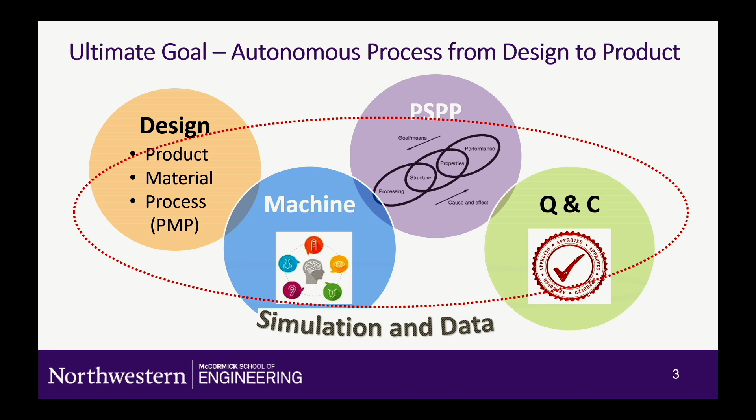One of the things we are focusing on particularly is flexible manufacturing processes. When we talk about flexible manufacturing processes, the volume could not be so much, but it's very much linked into distributed manufacturing or point-of-need manufacturing. One of the things we did with Ohio State as lead is this ERC HAMMER, hybrid autonomous manufacturing, moving from evolution to revolution.

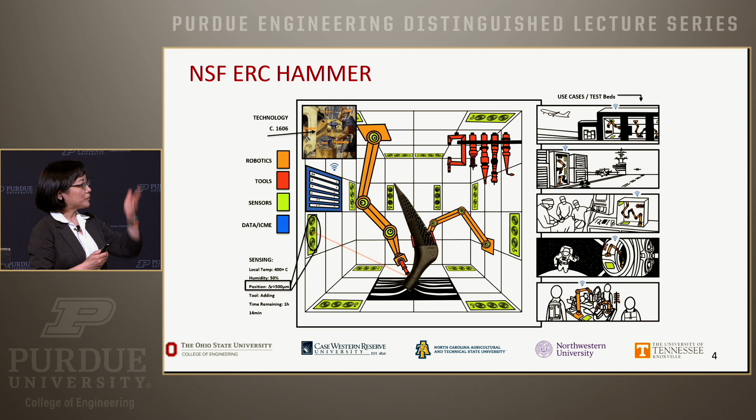So the vision is, if you have a flexible process cell, you can do additive, you can do machining, you can do deformation. The goal is certainly to get the property as well as the geometry right, and the performance of this. You can have it on a ship, near the hospital, in space - particularly here we are talking about space manufacturing a lot, so in space as well as around the corner.

So the vision is if you could have this coming together, what would be needed? As you could imagine, the design freedom is not just about a one-shot design. It's very much time dependent as well as localized material dependent - spatial and temporal degrees of freedom.

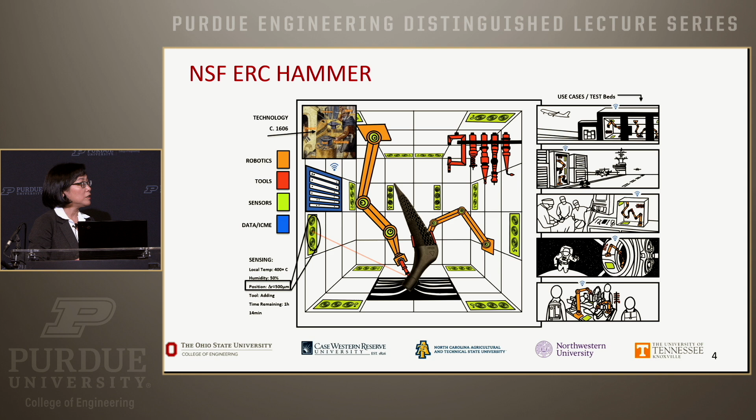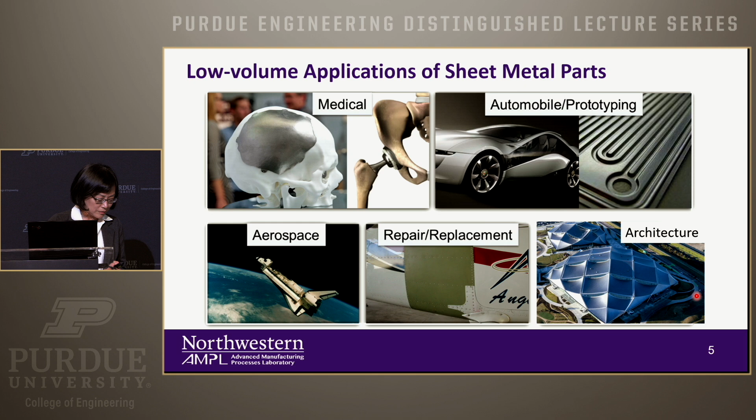And this process that made it is the so-called incremental forming process. The incremental forming process we do is so-called double-sided incremental forming. Instead of doing dies, which you probably need a lot of time for - like 5 months or more to get to the die and then make the part - with this flexible process you can really make all these different geometries from a single machine, but controlled very differently, computer-wise and software-wise.

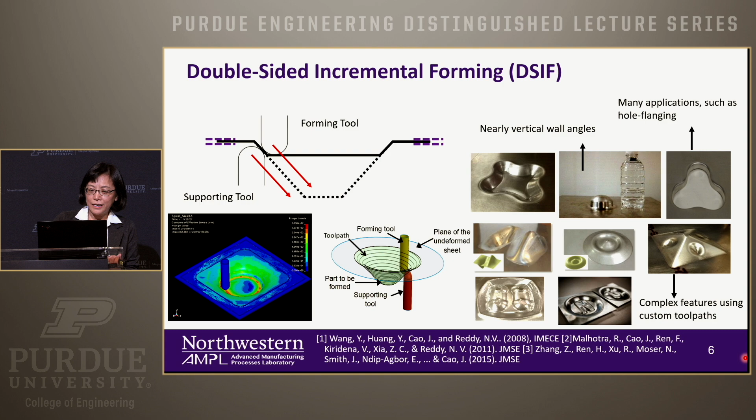If you look at the reference, this goes back to 2008 when we started this, and it's really great to see companies picking this up. The next video is actually from a startup company, now with over 100 people already in LA - the company is called Machina Labs, and they have been scaling this up with more degrees of freedom added to it.

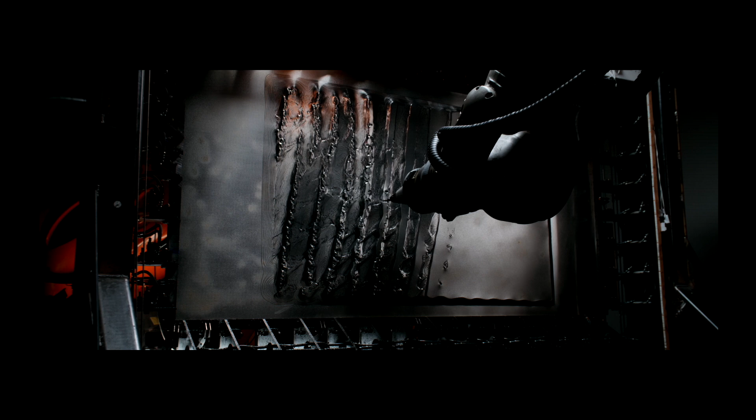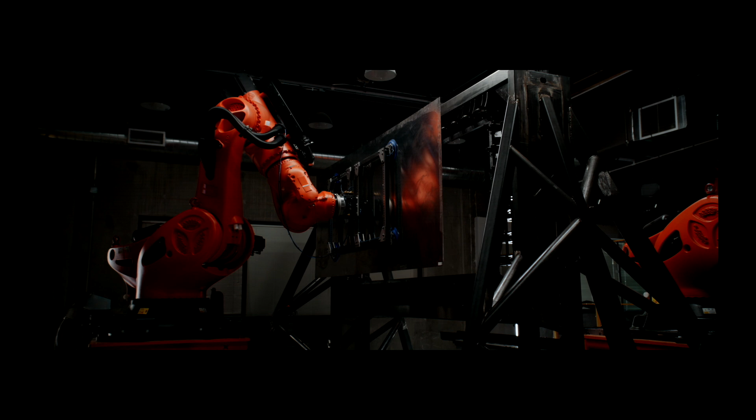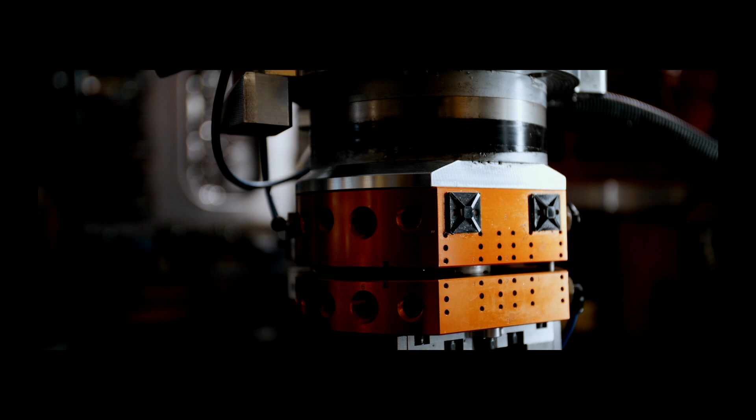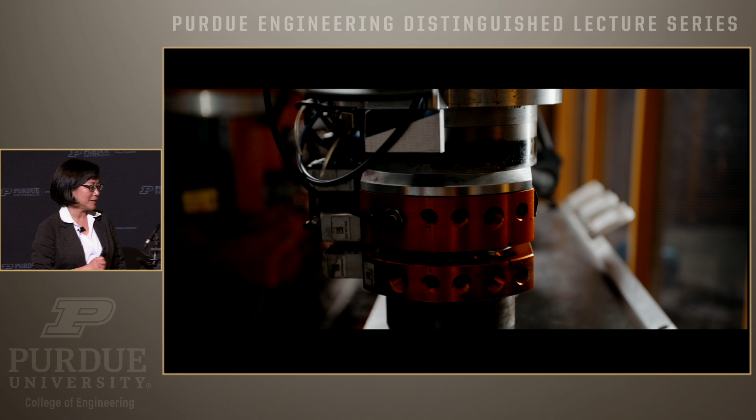The sound should come out if you could. But if it doesn't come out - I'm going to stop the video right here. But the message is, when you have robots combined with this flexible process, you can actually do quite a lot.

For example, if you look at all these four different parts with different materials, you can do it within a week. That is the speed up we are talking about in terms of the flexible processes.

However, the challenge is that when you do this, if it's a simple geometry, it's okay. But if you have more complex geometry, how do you make the first part right? A lot of mechanics and control goes into this.

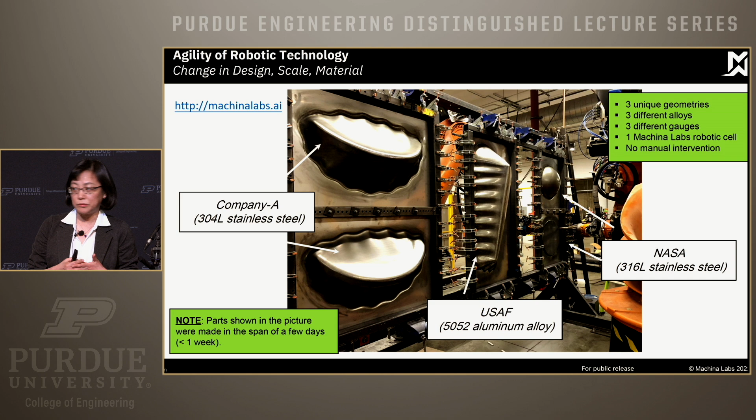You need to understand the material behavior, plan out the toolpath process, and do active toolpath feedback control. The bottom line is predicting the force needed during forming, because that force transfers to stress in the materials, and when you do elastic unloading, you get lots of spring back. So force control and force prediction are critical.

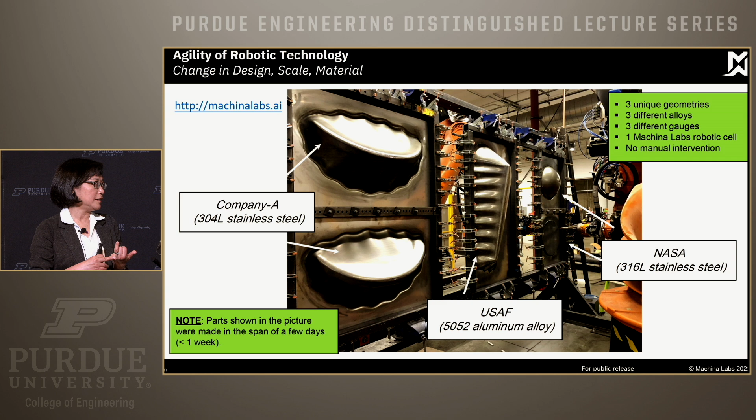So the question we ask ourselves is, when we do this in my lab - here's a scale compared to Northwestern's, and here's a human for reference. In my lab we have very small parts because we don't have lots of space, but the Machina lab here is 1.5 meters by 2, could be up to that size.

So how do we get the knowledge from what we have in the lab, combine it with theirs, and translate it to different scales? Our goal is: can we have a prediction that's machine-size independent? When you have different actuations, you also get different rigidity in the system - can the tool setup be agnostic of that? And if you change the material or geometry, can you be agnostic about this too? So how do we do this?

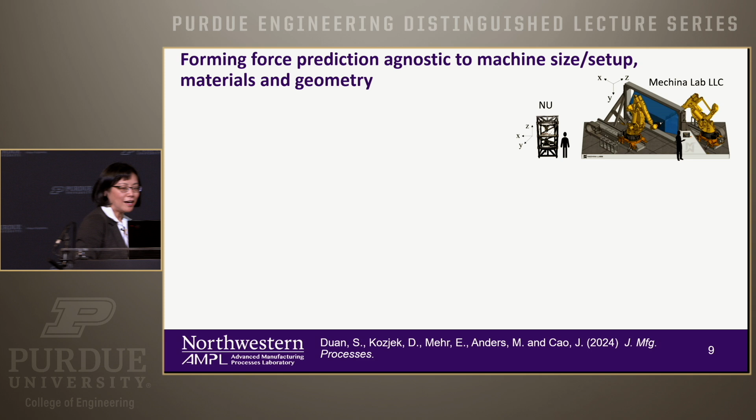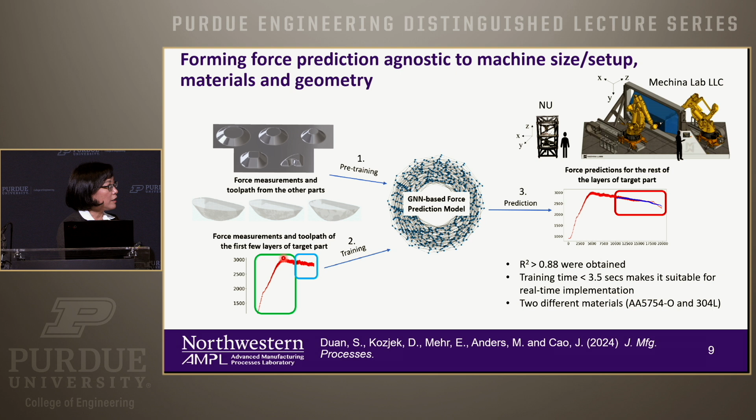AI comes as a helpful thing here. Here's a schematic of what we have. When you think about the mechanics, the initial several rounds of forming already involve the material. If you look at the force data, the initial part quickly goes from elastic to plastic, and for this area you already have the integrated machine rigidity and material properties - it's embedded information.

When you do the first few rounds, these are forming toward the bottom lines, so they're not at the final geometry yet. If you could learn from the initial points and adapt to capture that information, you can use it to predict what's going to happen later on. That's our approach.

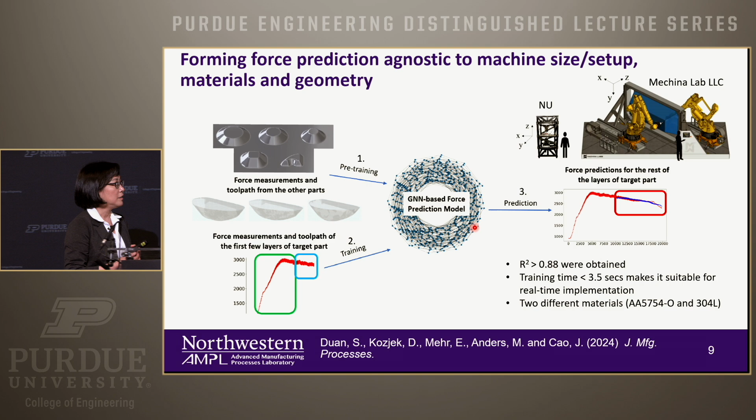In order to get geometric agnostic prediction, we also use a GNN in the middle as the architecture for the model. The bottom line is that understanding the fundamental mechanics of the process actually helps you design the strategy for how you want to use machine learning and AI in the prediction.

So we did this, and we can see that it actually predicts pretty nicely, and we're continuing to work on this to get more results.

I believe last time I was here we talked quite a lot about DED, so this time I'm not going to talk too much about it, and I'll focus more on PBF, laser powder bed fusion.

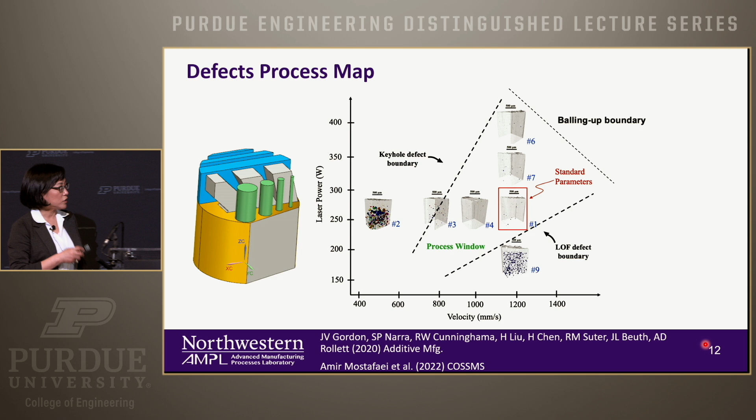We work with DMG Mori and also Zeiss on this, and they designed these very interesting features, where you have bulk material at the bottom, and then different cylinder sizes, different fins, and different kinds of angles. When they process this, they use different combinations of laser power and velocity.

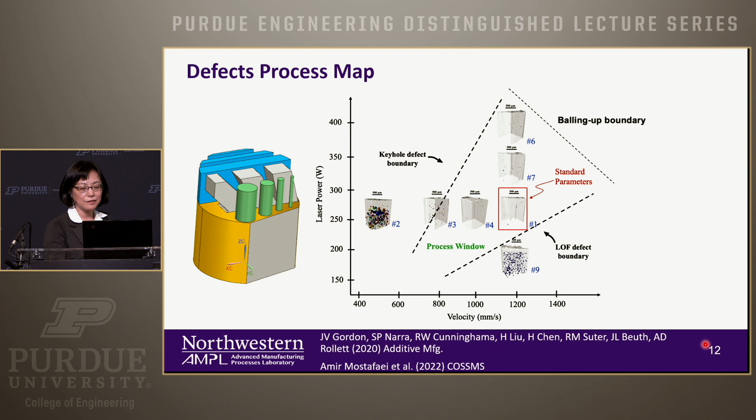So they did that, and after processing, they CT scan it. You can see the reds are the porosities. Many times we are saying it's not good. The greens are good. As you can see, certain process parameters give you lots of red, and they are in the middle, which is good.

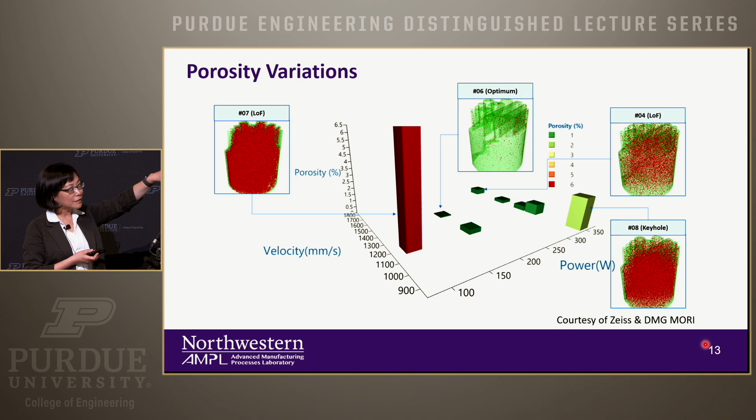However, if you do a little bit more careful analysis, here, they have 8 pairs of power and velocity. For every same position, it's basically the same process parameter. What's different is each block here is everything counted together the same way.

It will change the results quite dramatically. Now the question is, how do we design the process parameters such that we can make everything green? To understand this, we started with experiments at Argonne National Lab.

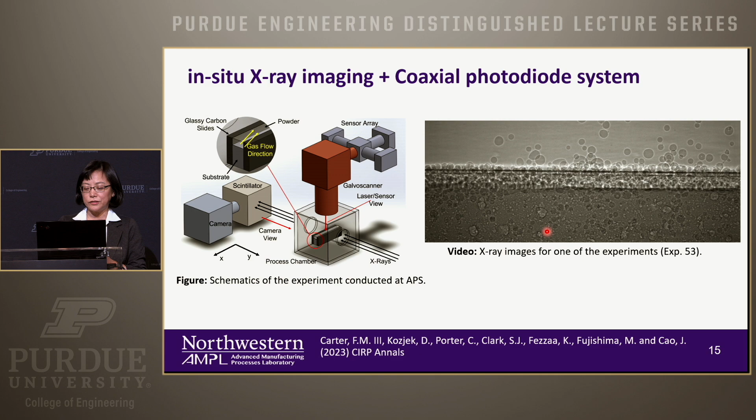With that intention, we went to APS, and you can see here, as the laser goes from right to left, you see the melt pool over here. This is a raw image, and after it goes, you can see sometimes they leave keyholes, they leave a porosity right there. So it's very hard to see.

So you process it, and in the processed images, what I want to give you attention to is the top row and the bottom row. The bottom row, particularly the blue ones - the blue ones are the keyhole depth.

One of the ways you get porosity is this keyhole becomes unstable and then collapses, and therefore it entraps vapor, creating this porosity. What we see is there's a really good correlation between this TED signal, which is the integration of the energy intensity, and the peak really corresponds well to this melt-pool depth collapse. The percentage for this one is 92%.

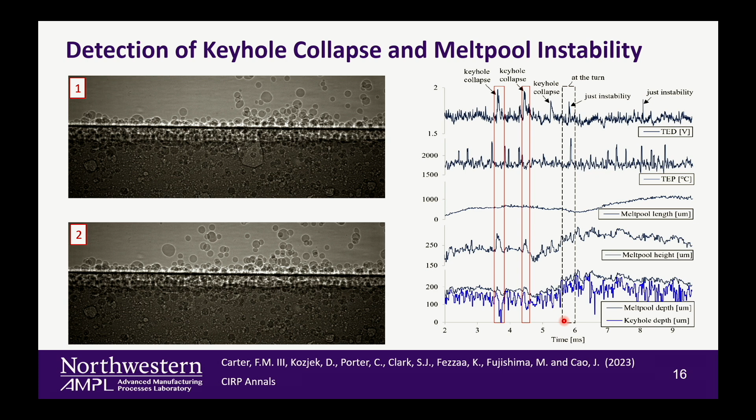So what this tells us is if we can sense this from the real process, we can assume that a keyhole is likely to be formed, 92% likely. With that, the idea is, can we use this to look at larger scale, as well as how to design the process to overcome this porosity issue.

We use this method, and there are some additional data processing methods I'm not going to have time to talk about. But you can see that when we did this, using those peaks, this is a part made on the commercial machine, the DMG Mori, the one where we stripped out a lot of metal and installed the photodiode system.

So we count the TED peak versus after, as I mentioned, with the 8 different sets of parameters, they have the pore count. And you can see that it's a really great correlation. The one outlier right here is because the process parameter of this one is lack of fusion, not due to the keyhole.

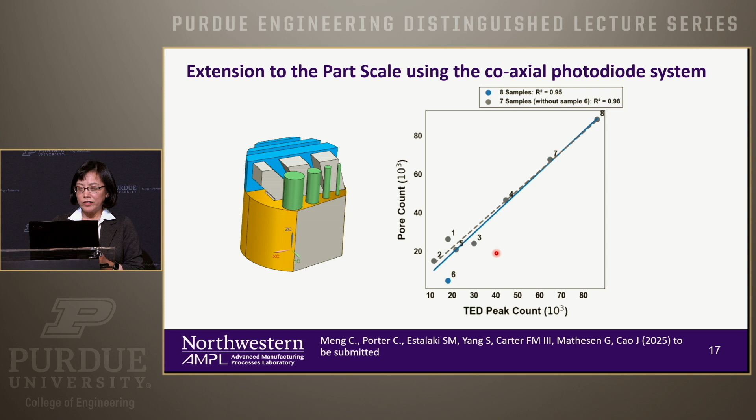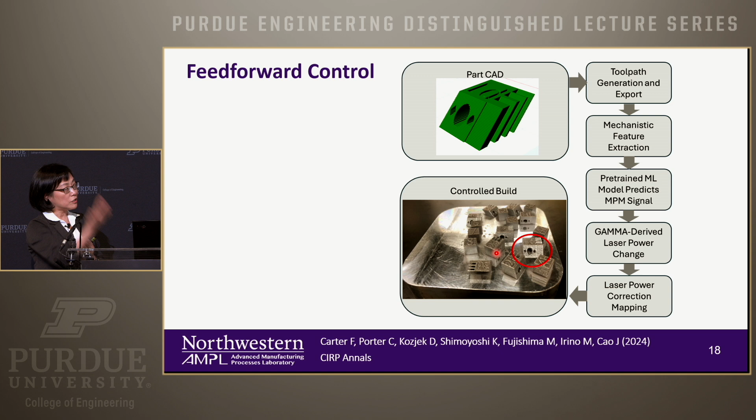So this gives us some confidence, and then we are saying, okay, can we look at the different geometries, can we make the process reduce the porosity? So the idea is the following: you have the CAD file come in, and you have the scanning path designed, so you can output these toolpaths.

And then what we do is called a mechanistic feature, which I'm going to tell you a little bit later. Those features we use, using the machine learning tool, to predict what is the temperature distribution that we are going to see. And if we see the temperature distribution, it's actually a signal of those peaks as well. So if we see that, then there's additional peaks.

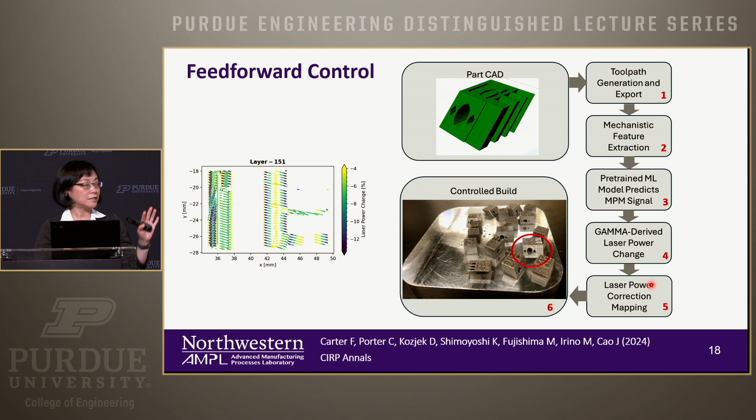Then what we are going to do is lower the laser power and adjust it accordingly, locally. Using Gamma, an internal code that we developed, we change the laser power and implement it on real parts, doing another build with laser power not constant, but changing as we go. This shows, layer by layer, how we are changing the laser power.

One thing you know is that qualification and certification is pretty hard for AM. We hope with this, because it's an open loop control and we know the machine, we know what laser power we are giving, it gives a little bit easier time for the part to be qualified.

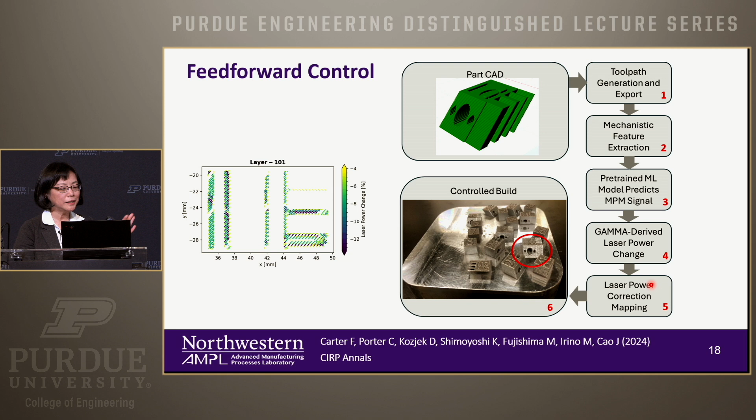So the key thing is, first, we need to be able to predict what's going to happen, in terms of the high temperatures that potentially give those peaks. This is measured with the photodiode system, and here is the predicted version using the mechanistic feature I mentioned earlier, which I'm going to show in detail later, to predict what's going to happen.

Now, one thing I want to draw your attention to is this: here, for example, around the boundary, your laser is turning, and you see the temperature profile. But also here in the middle, the laser is also turning, but the intensity is very different from the edge. This tells us you really need to take into account the material geometry, part geometry, in addition to just the toolpaths.

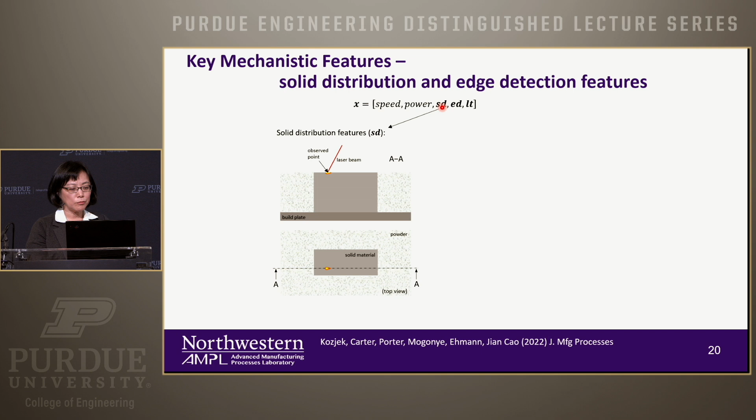This gives us the idea about the features we need for predicting the profile. So certainly you have the laser scanning speed, the power, and this SD is what I mentioned earlier. The temperature very much depends on material thermal conductivity and many other things. So if you have a solid part versus a powder part, you'll see different behavior.

So the way we characterize, trying to be agnostic to geometry, is to develop this feature. You can think about this as a hemispherical region. If it's 100% solid, it's 1. If it's partially solid, you calculate the percentage. You have multiple of these rings, actually multiple of these hemispheres.

By doing that, it's a vector. Here you have a vector of this SD, which gives you an idea of the solid area surrounding this point. Similarly, as I mentioned, the edge versus the middle is also different, so you can also get edge features by doing this geometric analysis. All of these features, you can do offline, once you have the part, you can analyze this.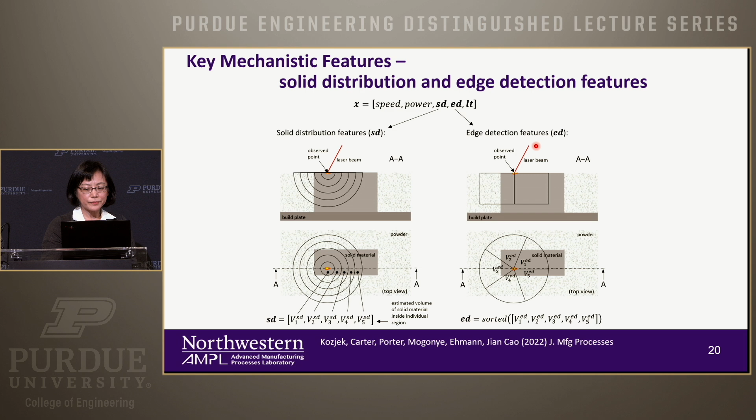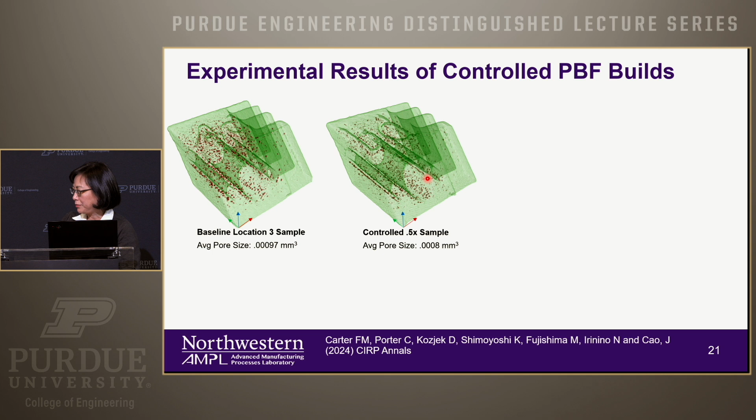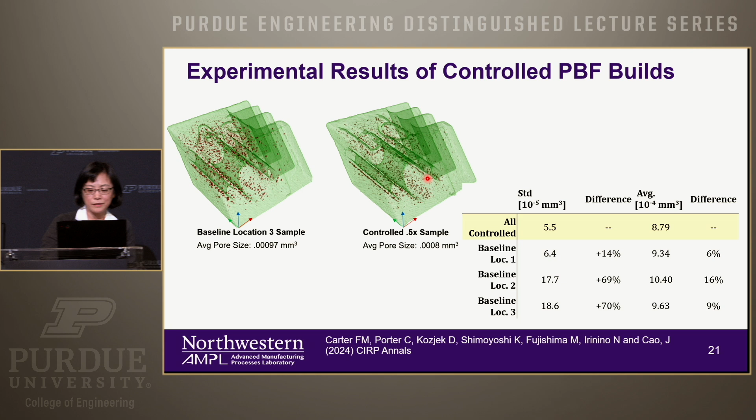So this is not comparing to some of these bars you see that are really red. We are taking the best parameters from the constant processes and comparing them. This is the one on the right, which we call controlled. You can see the porosity is much less, as well as the shape being much more uniform. This is particularly important because when you look at the fatigue analysis and its impact, you can actually have a significant effect.

So we talked about the machine modification where we added sensing in, and about how we do laser control for qualification and certification to give you better parts. The next thing is also this PSPP.

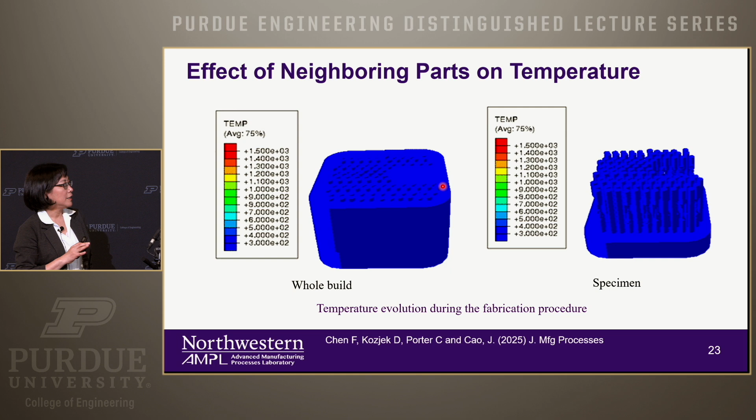We know the property is very much dependent on the thermal history. Therefore, when we build up the parts, we want to know what thermal history it's experiencing. The particular work we're doing here is checking the effect of the neighboring parts. If we're just interested in these regions, when you try to build AM parts, you try to stack as many parts as possible, because build time is dominated by the number of layers. So people put lots of tensile specimens and other things. Our question is how the surrounding areas will actually affect the parts, depending on where you are.

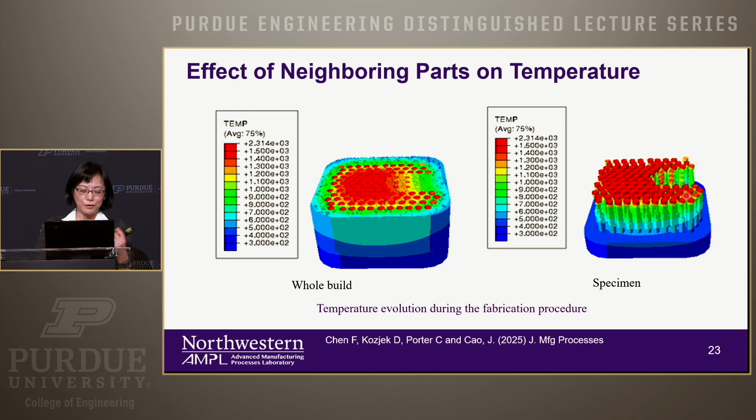Just a quick illustration: if you look at the group of them in the middle, and consider the surrounding parts' contribution, you get this kind of thermal image at one moment. If you just simulate a single part, it's going to be very different compared to the case when you have the surrounding ones. The challenge of considering surrounding parts is the computational time.

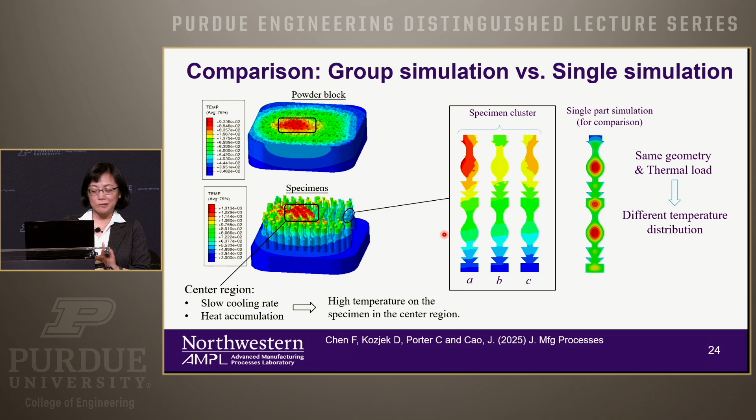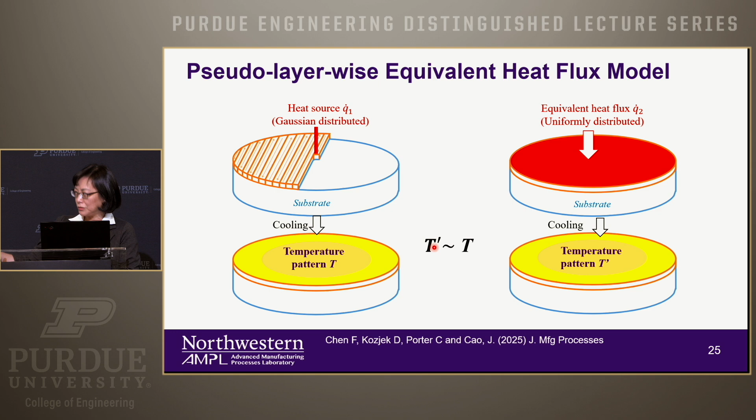So the question is, is there any way to quickly capture that? The idea is pretty simple: we know temperature depends on the heat flux coming in. So instead of modeling the laser path path-wise, can we create an equivalent heat flux model? Because after each layer you cool down, the idea is if you do the layer-by-layer scanning path-wise versus the heat flux equivalent one, after a certain time they become equivalent. So we take this equivalent model, and you can do a square or circular cross-section, almost like the unit cell model.

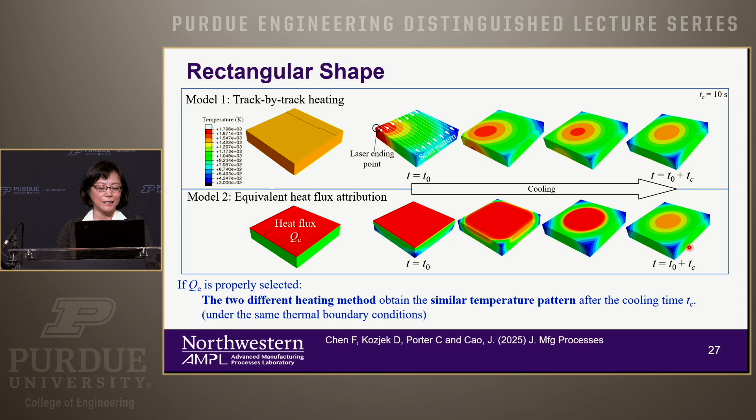And then you put those in, and we can simulate this as we build up the entire plate. The first animation that you see is using this approach.

Now, very quickly, about the photodiode system I mentioned - this is a sanity check, not quantitative but qualitative. If you have multiple parts simulated at the same time, the orange line is our experiment using the photodiode, and the blue line is the simulation. You can see that qualitatively they match much closer compared to just a single part. So this gives you a very quick way of checking your temperature profile.

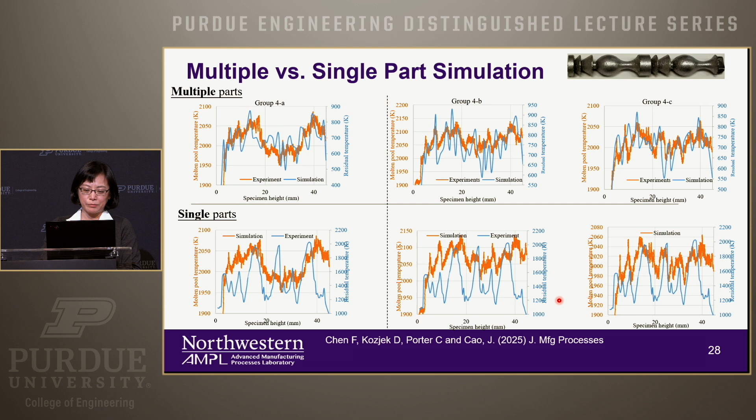So finally, I want to talk about design - particularly here I'm looking at process design. Two years ago, I talked about how we designed the laser power with the DED system. The goal at that time was to achieve a certain thermal history, and to do that we know heat will build up during the DED build. So what we developed was a differentiable gamma simulation code for this DED process.

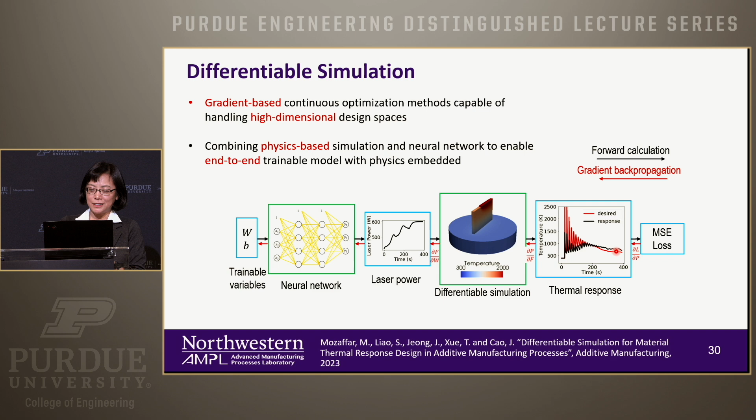The package we developed is called JAX FEM. This one is differentiable. We're using JAX, which is a Google library used for machine learning, because it gives you an auto-differentiation function. But our JAX FEM is basically still a finite element method.

For the sensitivity, for example, if you try to calculate the stiffness matrix, the Jacobian, you can use the auto-differentiation tool. You explicitly write out the equation and it gives you the auto-differentiation, and then we can use that sensitivity to do the optimization.

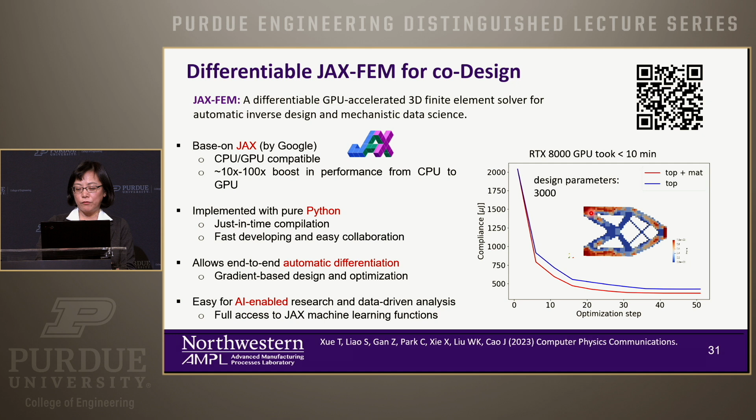So it's open source. It's in Python and has just-in-time compilation, and can also connect with GPU acceleration. It's open source, you can download it, and because it can give you sensitivity for free, you can use it for topology optimization as well.

The example you see here is a very typical compliance optimization. What we're optimizing here is not just topology. You see the color bar - it also gives you a range of the yield stress difference, so some material could be softer, some could be stronger.

So if you co-design this with the geometry, topology, and material together, you can see the red line gives you better compliance - it's actually about 13% better. And the potential of this is you can optimize like 3,000 parameters, and with the GPU it's only 10 minutes.

It's relatively easy because it's an elastic problem, but the goal is JAX-FEM right now - we already have elastic plastic, hyperelastic, all incorporated into this. So what we try to do is really bridge the physics-based simulation with machine learning tools to speed up this numerical simulation.

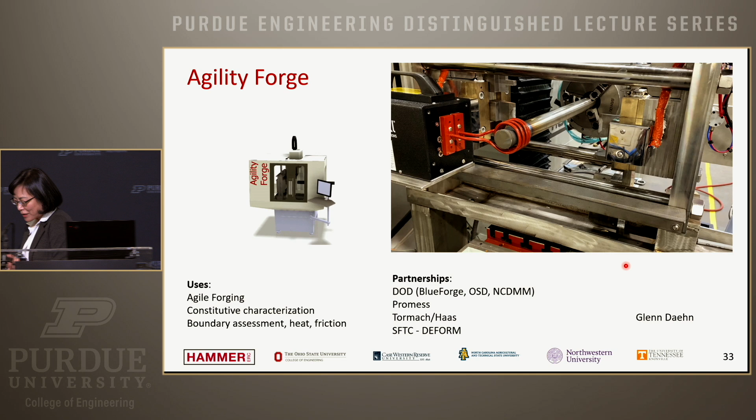Our application for this is the following. I mentioned ERC at the beginning, and I'm coming back to it. At Ohio State, our PI Glenn Daehn and his group developed this Agility Forge - basically a flexible forming operation.

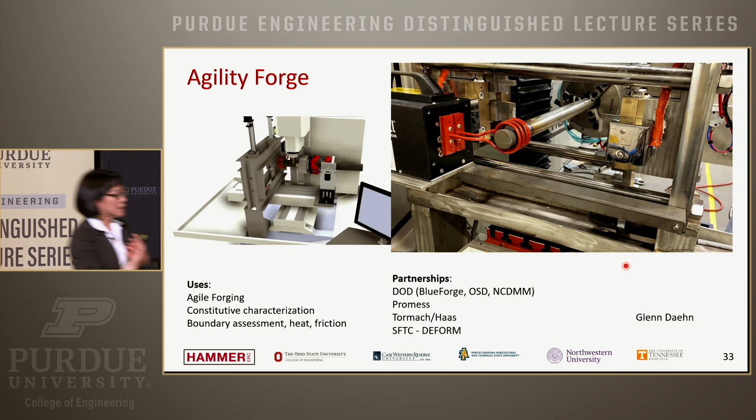For lots of parts, particularly some larger parts, you need a larger press. So the idea is you can actually do local heating in different ways, change the tool, and do basically free, open-die forging with lots of flexibility.

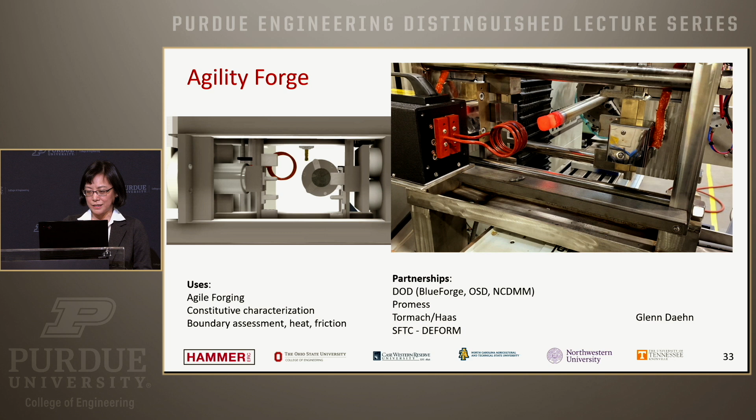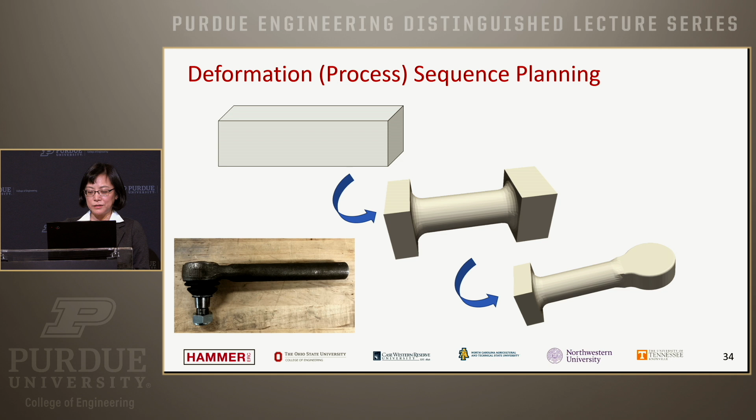So the question that links to this is the deformation path design. Let's say you start with a block and you want to make this wrench - there are many different ways to go from the original block to the final shape.

So you need two things. One is globally, you want to get the geometry right. And locally, looking at the material side, you also want to get the material property right. The material property for metals really depends on your deformation path, so you need to incorporate all of this from beginning to end.

Many times we have very experienced engineers or shop floor workers who have accumulated 20 or even 30 years of knowledge, and they can actually plan this out really well.

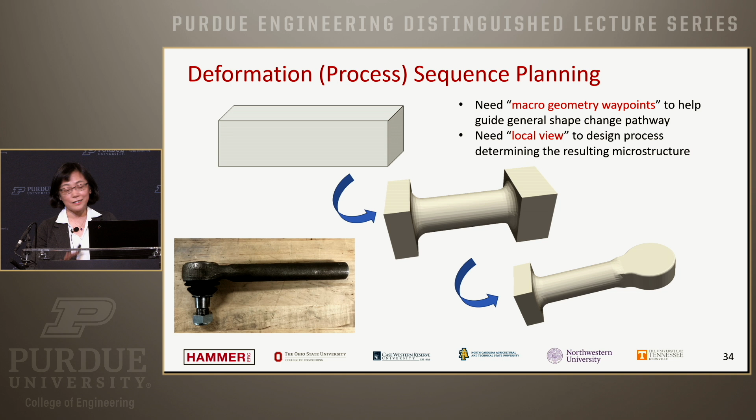So the question is, can we make this an autonomous planning process? One thing really interesting is a colleague at OSU developed this so-called gamification - it's kind of like a video game where you play with different deformation paths.

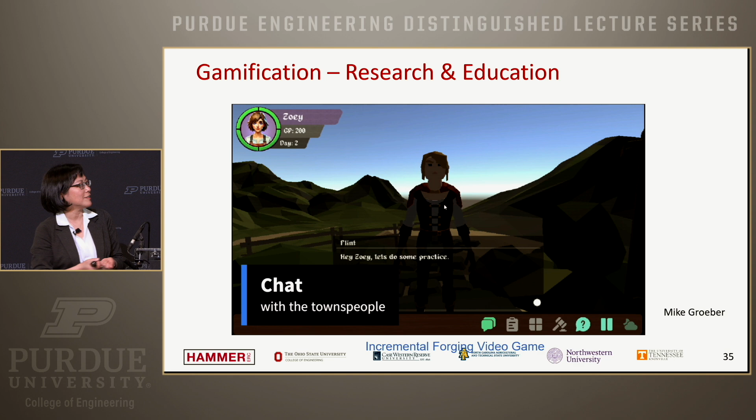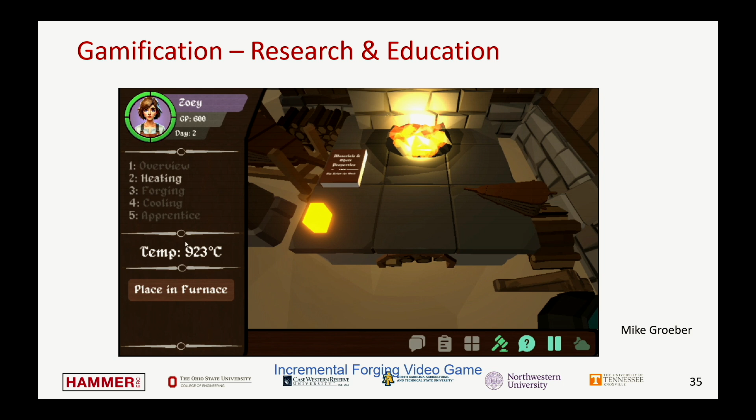The goal is to have the minimum number of hits to get to the geometry you want, and you can play with this. The question then is, when you do something like this, you want to get the mechanics into it. But if you really do a mechanics-based simulation, it takes a very long time - maybe even 2 minutes per hit, and you wait there. Nobody will play this game.

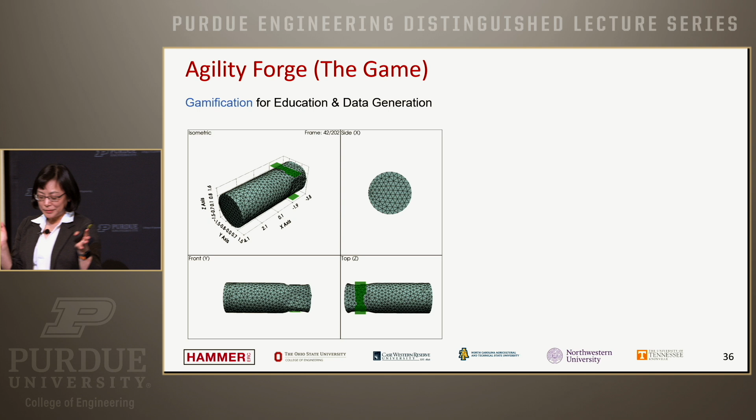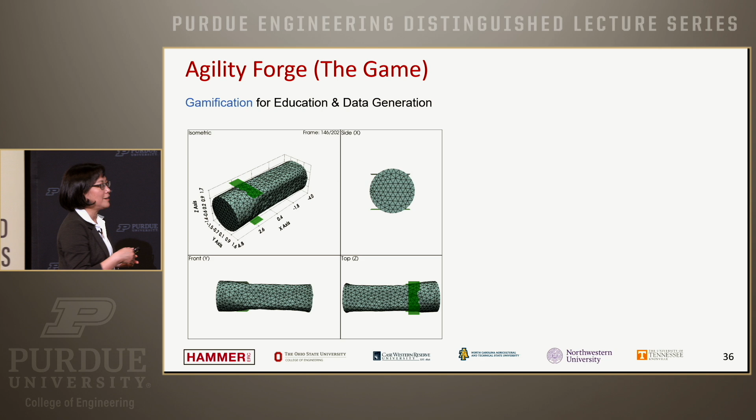So this is where JAX-FEM came in. The engine of this is JAX-FEM, and you can put in different hitting paths which actually have the physics in there to give you the geometry as well as the material states. We put all these things together very nicely.

Now it only takes about 10 seconds to get a hit, so people can actually play the video game. We are trying to speed this up even further.

The next question is, I mentioned the geometry, but what about the material state? For the material state, we build on this JAX-FEM and put crystal plasticity in. For people here who work with mechanics, crystal plasticity is really nice, but it takes a very, very long time.

So our goal is how do we shorten it, right? So we have this crystal plasticity. We use Kalidindi's well-established hardening laws to model the slip and twinning behaviors, and we put this into the FEM framework, as I mentioned.

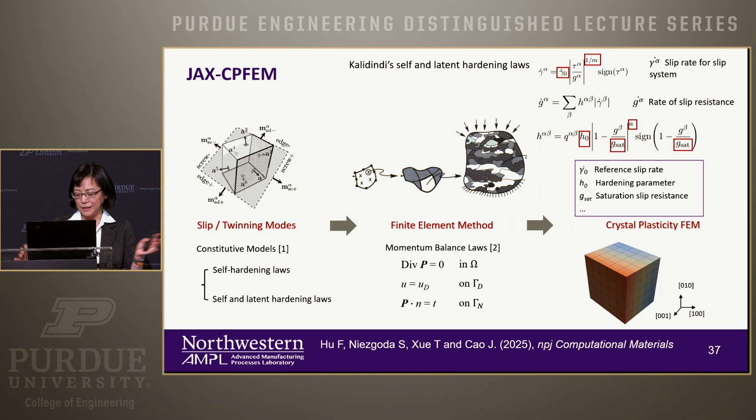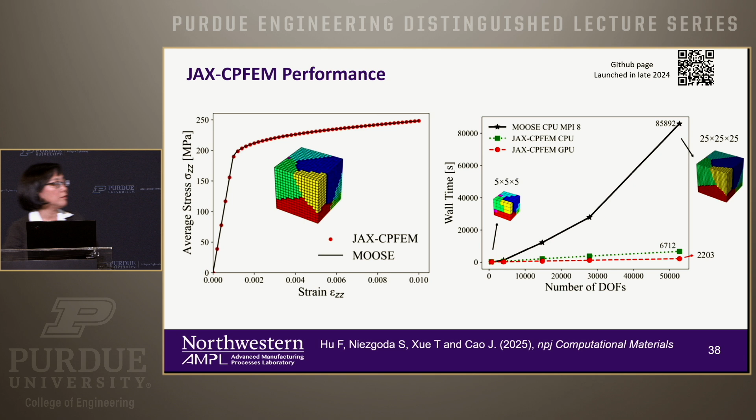Then you can calculate, for example, this is just 1D, but we did this with multi-grains, and we compare it with another open source code, Moose. It matches pretty well. We also put it out as open source, so you can scan it, download it and use it. With the time that we have, it really has a lot of advantage when you have more degrees of freedom. So 5 by 5 by 5, it's probably computational time very similar.

But once you go beyond that, more and more, you can see JAX-CPFEM is down here, so there's a computational advantage. So with this, then what we can do is we can incorporate it with the optimization, as I mentioned.

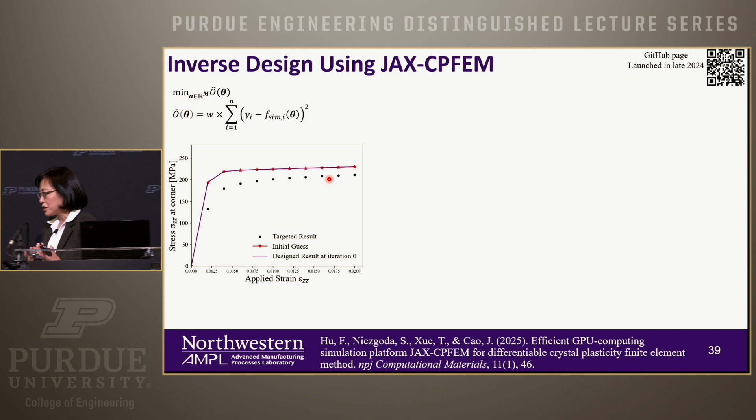What I really want is the inverse design, right? So let's say I have the material and I really want to have a certain yield stress, and also a certain energy absorption capability. So let's say you have the design, this is where the design stress-strain curve comes in. If you want to have this design, the dotted one, what is the microstructure you need to give you that behavior, right? You can start with the Euler angle, with constant ones across this grid.

And each one, if you do the inverse pole figure, material science people would know, it's right here, which is the initial design, the red line. So the question is, can we find out the microstructure that will give us this dotted line, which we basically use JAX CPFEM and the optimization for.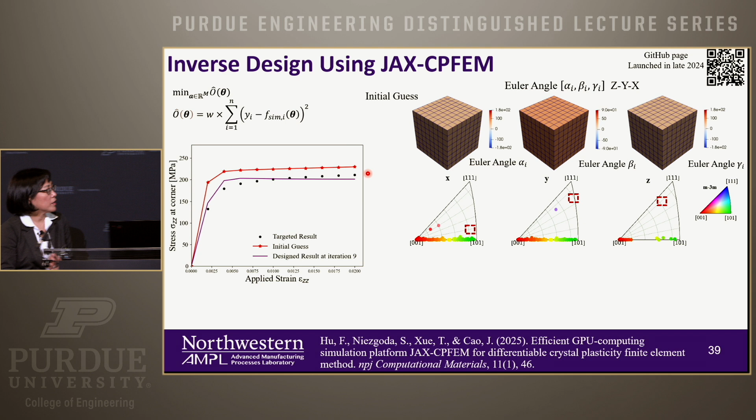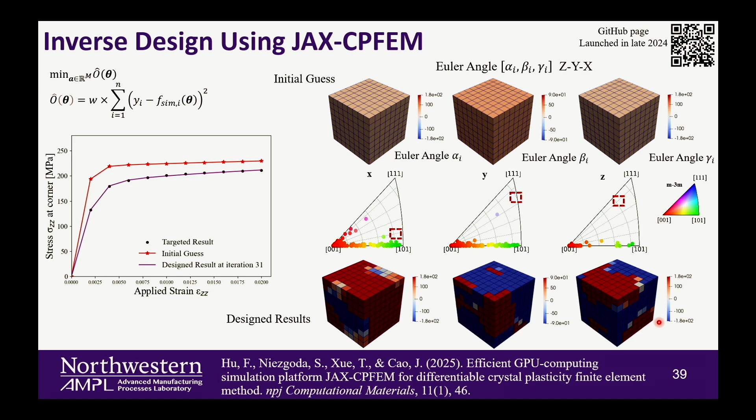After you run it, about 30 different iterations, you can see that each cell in that block is actually going to give you a different phase. So it ends up with this geometry, you look at the microstructure. Now with additive manufacturing, you can actually make it locally control the properties, right?

Going back to the deformation, I'm just going to finish up with this last slide. If you want to have this kind of stress-strain behavior, even at different ratios, what is the loading path, right? Remember I talked about this for the gamification. So what loading path can give you these different stress-strain behaviors, and you do the inverse analysis, and then you can see that you start this one, and it can also calculate the strain path for you.

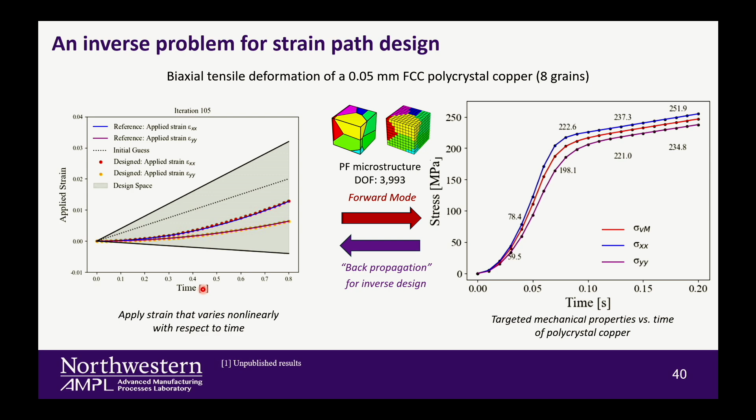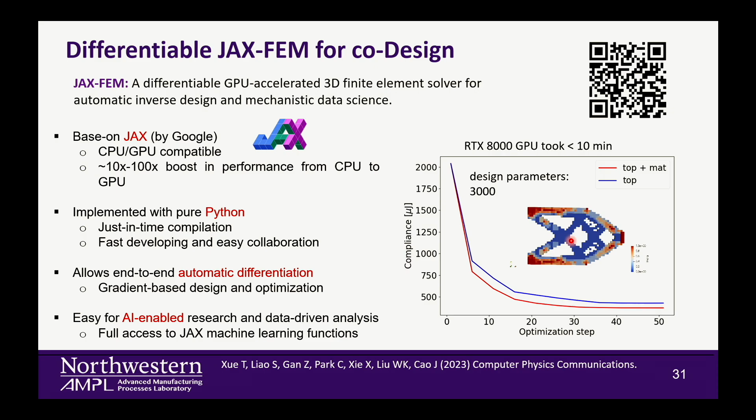But when you do the manufacturing processes, that's certainly a question of whether you can do it. Second, many manufacturing processes also have this tolerance gradient. So what we are doing now on another project is actually putting the manufacturing constraints into this optimization, because right now each voxel you can really independently control from the optimization point. So when you're really looking at the co-design of the material topology and the process, you need that kind of manufacturing constraint put into the optimization code. Yeah, that could be a PhD thesis, so keep working on that.

Okay. Hello. All right. I'm Nico. I'm also a freshman, and I hopefully go into mechanical engineering.

What was the name of the company that was in the video, the one in the beginning presentation? Machina Labs. You can search it, you'll find that. Okay, yeah, thank you. I just find the industrial robots and integrating that with manufacturing is kind of what I want to go into.

Yeah, so the founder is a real entrepreneur. Many times when you think about this, people will question the robot's rigidity in something like this forming, so you do need actually a lot of compensation in the robots to make that work.

Yeah, and they're located outside of Los Angeles, so if you're looking for internships... I'm on the East Coast. Oh, East Coast. It's kind of fun, okay. But thank you. It's okay, you can travel.

Other questions? Yes, or you can start up here. Hi, I'm Sophie, I'm also a freshman, also hoping to go into mechanical. Oh, great. I was wondering, you mentioned your powder blown machine in your lab. Can you talk a little bit more about how you guys constructed that, or what the process was like?

Oh, the powder blown one, right? Let me see here, do I have it? Yeah, this one, right? So you're asking how we made this one, right? Yeah, so well, we use...

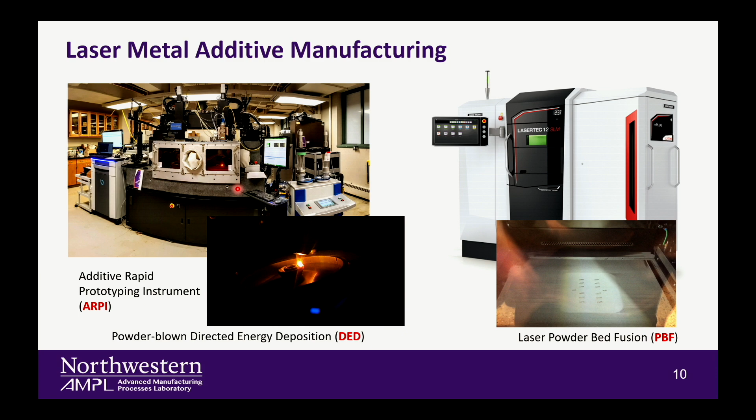this is a DED, so we use IPG lasers, and we use Fraunhofer nozzles, and we use Aerotech stage, and actually the environmental chamber was developed by undergrads. So you can see the environmental chamber was developed there. And the photodiode system, so when you put all these things together, the photodiode system was developed by a PhD student at that time - actually Sam was the one.

And then you have different hoppers, so we have the hoppers from both GTV as well as Powder Motion. And then the powders, two of them are here, four of them at the back. And then what we do is we develop their own mixing. So the mixing is not like pre-alloys, they mix them and then feed them to the line. This is the mixing during the line.

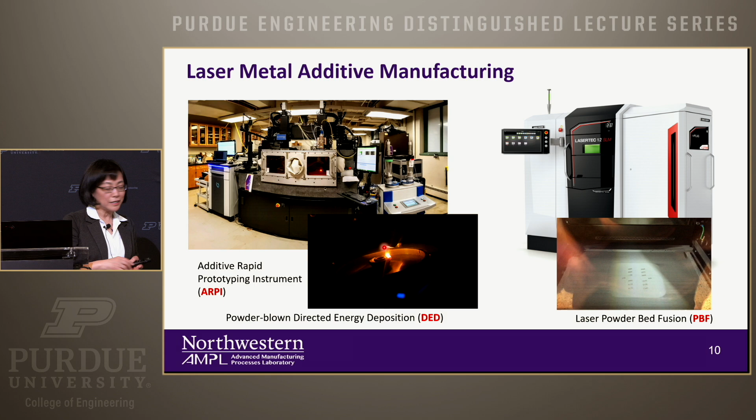So there are both advantages and disadvantages of doing that. Basically we have a mix at the back, and then we feed it in. So you can see that they're coming down, and you use a laser to melt it. And the stage is a 5-axis stage.

Okay, there's a question on the end. I had a question about... Can you introduce yourself? Yeah, I'm Vikrant, I'm a 5th-year PhD student in mechanical engineering. And I had a question about accelerating the computational simulations.

So like you did with deformation, what do you think about doing it for additive manufacturing? Is the process of simulating additive manufacturing very hard to be accelerated on the GPU? And I see that you can do a lot of things with inverse design if you can capture the physics of laser melt pool manufacturing.

I'm sorry, can you ask the question again? I couldn't hear you very well. Can you maybe hold the mic closer? Yeah, so it was very interesting to see your work on accelerating the deformation simulations. And my question was, did you think about accelerating the additive manufacturing simulations? And is the physics very complicated to capture in the first place?

Definitely, that's ongoing work, definitely.

We actually first started with this gamma code ourselves. Basically, that's a thermal approach. Then we did another just thermal, and then we have gamma mechanical, which is thermomechanical. So the topic is very wide, actually, because when you try to simulate the residual stress...

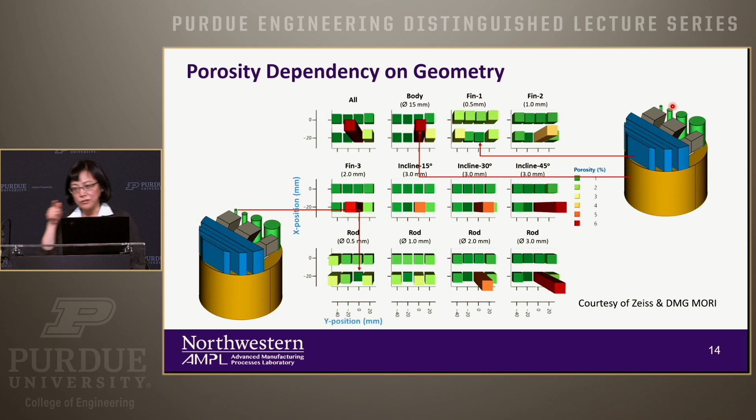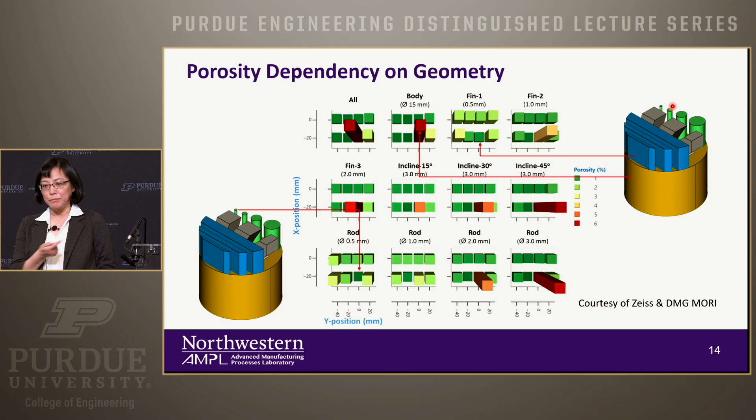Any insight? Yeah, so if you look at this, some of the things are 0.5 millimeters, right? Those are some small ones, and that's just because the size of the CT scan has some limitations, and they want to put different geometries into this. If you look at 0.5 millimeters, and also the laser spot size typically about 50 microns, it's about 10 times difference. And then it also depends on how you scan it - there's also turnaround which affects things, because if you scan this way versus that way, it's also different. If you have the rod, you scan it a different way. The boundary condition - that's why the boundary conditions start to show up. This is where some of the mechanistic features I talked about give you an impact on the heat accumulation, and that will also affect the melt pool stability.

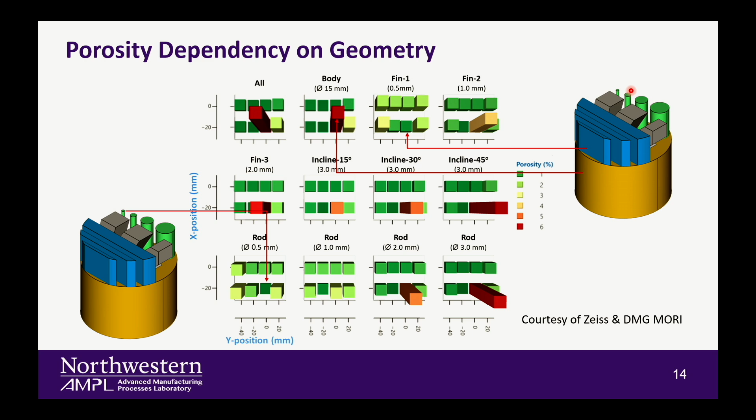If I may have a quick follow-up question - so now if I want to take this and create a complex geometry of the heat transfer inside an engine, now how do I do the laser path planning and scanning, because if each geometry is going to allow me different types of defects, how to optimize that for a much more complex geometry is where I'm going actually.

Yes, very good point. Let me go back to this one - you can see that for the scanning pass, there's lots of different combinations you can do. This is why, in some way, the photodiode system we put in has a resolution of about 6 microns, so we can actually capture these local scanning pass effects. So your question is how do you design the scanning pass for the larger part? I do think when you design it, it's another inverse problem. For example, you try to have much more uniform thermal signatures - that could be your optimization.

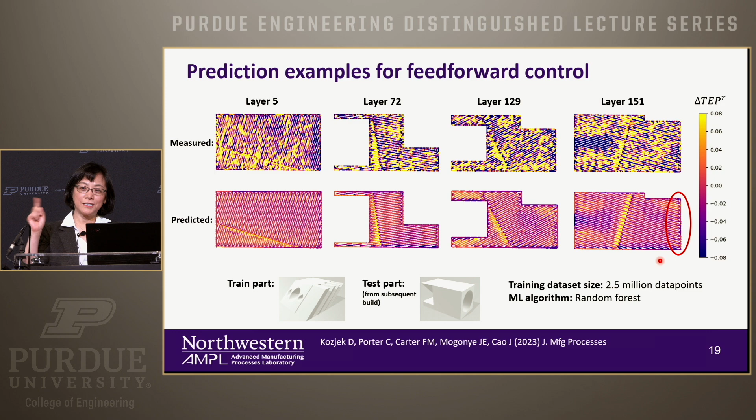And then you can actually use the mechanistic feature also to predict and then close the loop. There might be other ways, but there could be a lot of research going forward. We haven't done that, but I do think the next step will also be how you design the laser pass to create a better scanning pass profile, yeah.

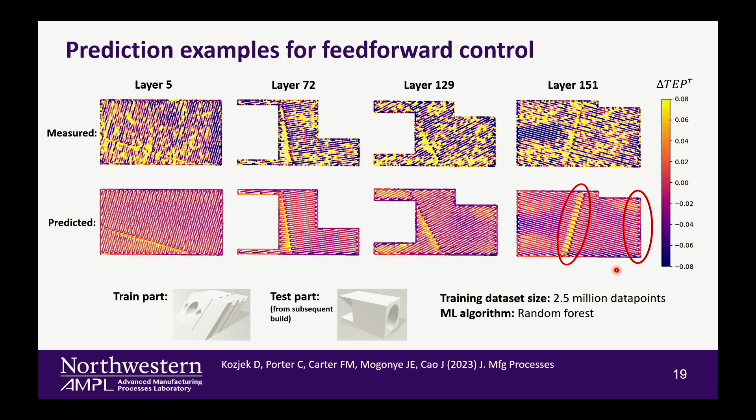I liked the student's method, I just wanted better answers. No, this is great - but my point is the method we talked about here is scalable, because if you look at those mechanistic features, it's really scalable - if it's a very large part, you can just increase the array size to do that.

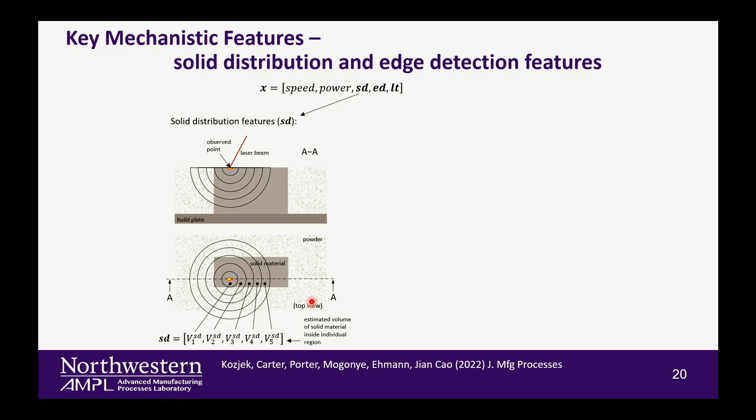Okay. Thank you very much one more time, okay, please, for a distinguished lecture. Thank you.